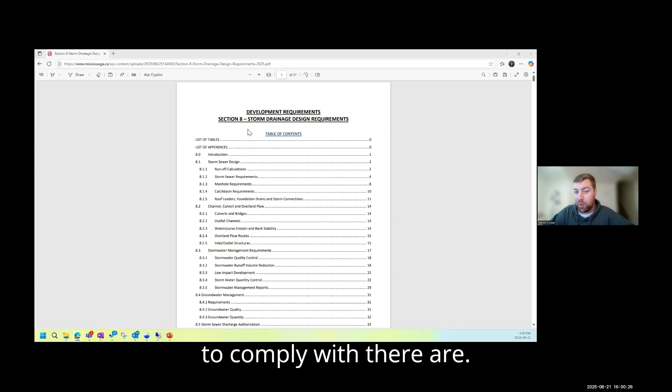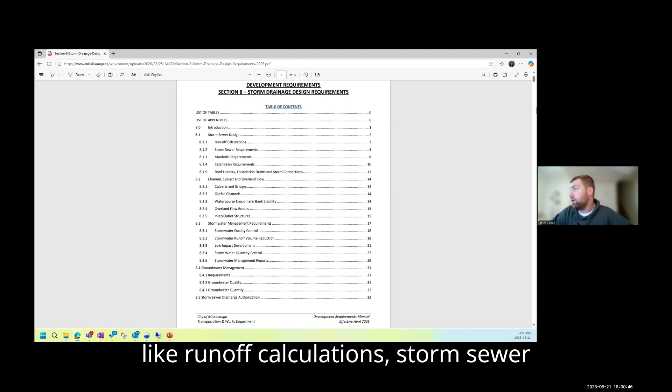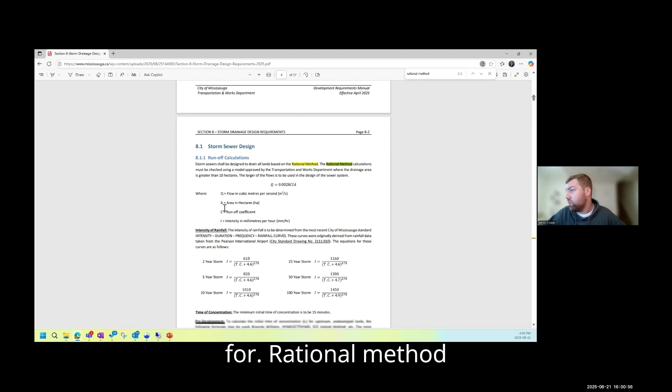So just as some context for what city staff look for, what conservation authorities review, and what developers have to comply with, there are, I'd say often, but probably always, going to be storm drainage design requirements for cities. So anytime a developer wants to build something, they have to submit it to the city meeting the requirements outlined here. You can see in the table of contents there's runoff calculations, storm sewer requirements, catch basin requirements, all of this stuff. And if I look up, we're going to look for rational method, for example.

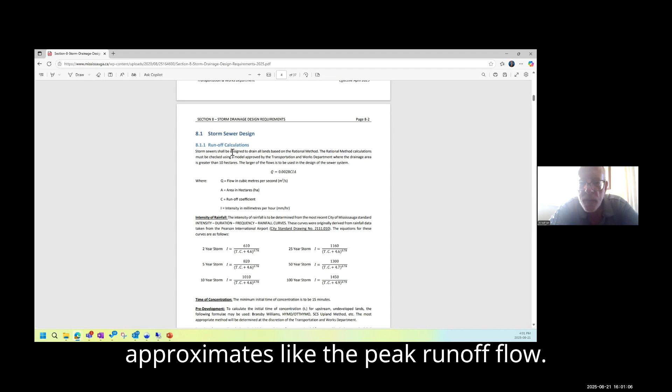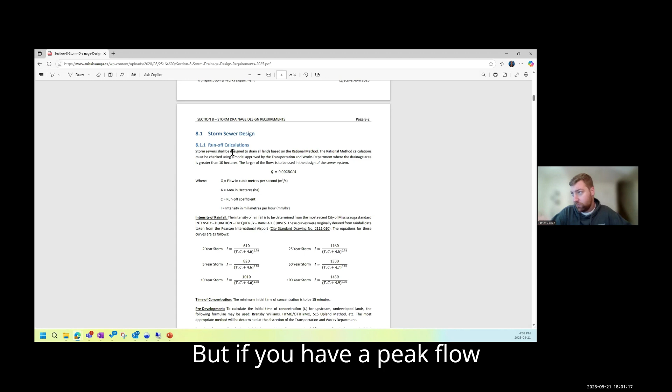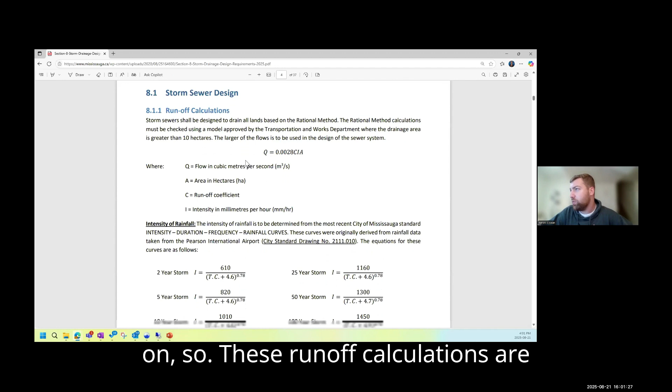There is this very simple formula that is often used for smaller developments that approximates the peak runoff flow. I'm sure you can appreciate that when it rains, obviously the amount of water matters for flooding and this and that. But if you have a peak flow rate, a maximum flow per second that exceeds some threshold, streams will get blown out. That's when you get heavy erosion and so on. So these runoff calculations are kind of the bare bones of that analysis for stormwater.

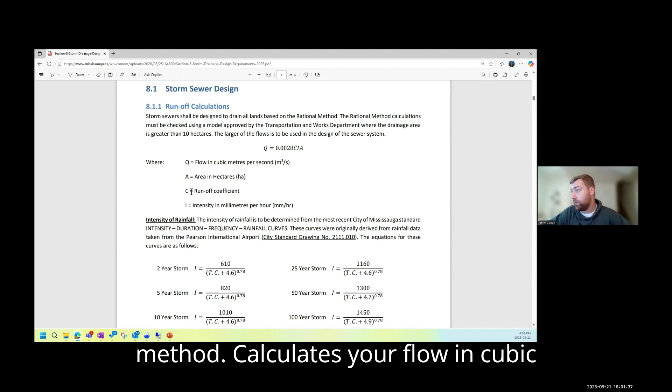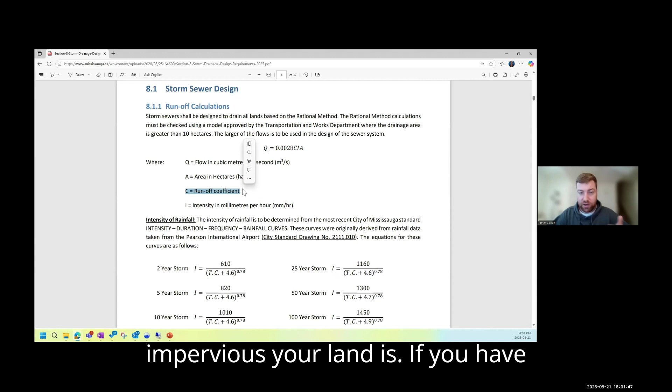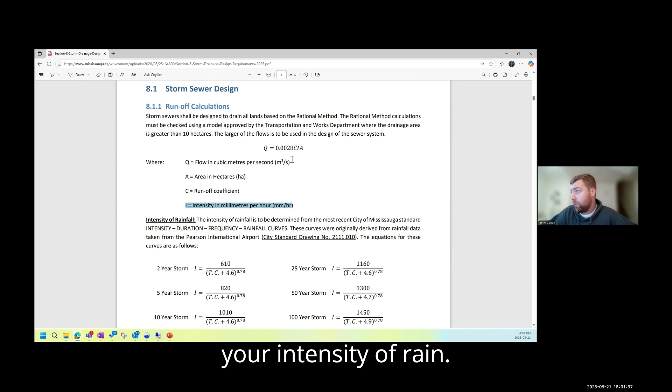So runoff calculations: the rational method calculates your flow in cubic meters per second using the area of a particular drainage area, a runoff coefficient, which represents how impervious your land is. If you have buildings and parking lot and grass, sometimes it's kind of a composite, like an average. And then you have things like your intensity of rain, and then that will give you a flow in cubic meters per second according to this version of the equation.

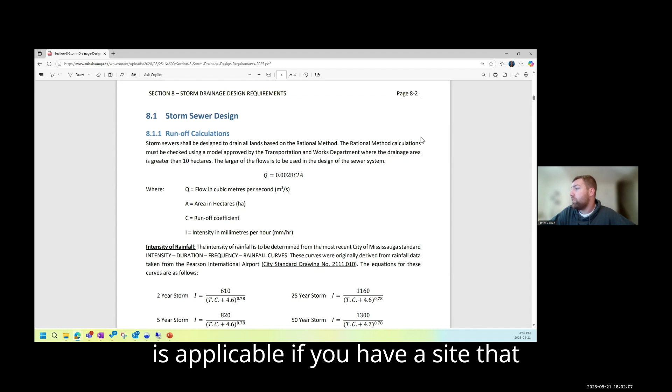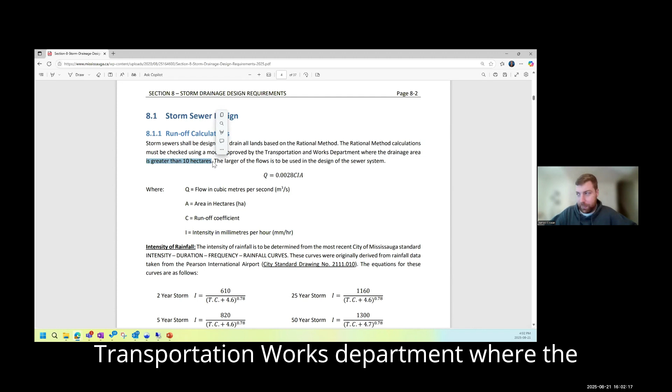And the rational method calculations must be checked using a model approved by the Transportation and Works Department where the drainage area is greater than 10 hectares. Okay, that's good to know. So the city might have experience reviewing, or whoever you're talking to at the city, this Rajesh gentleman might be familiar with some models for that reason.

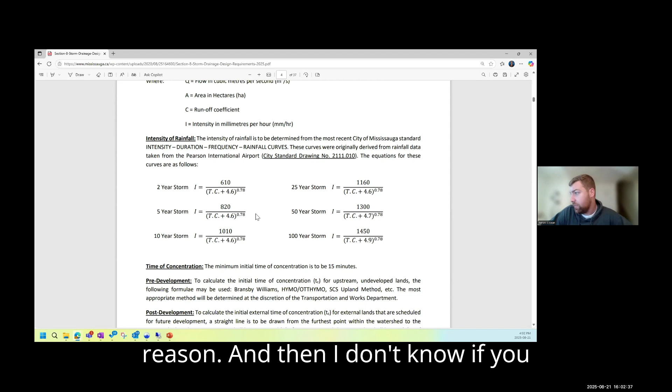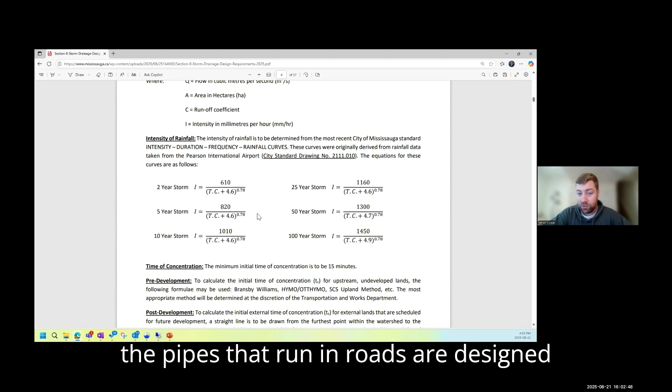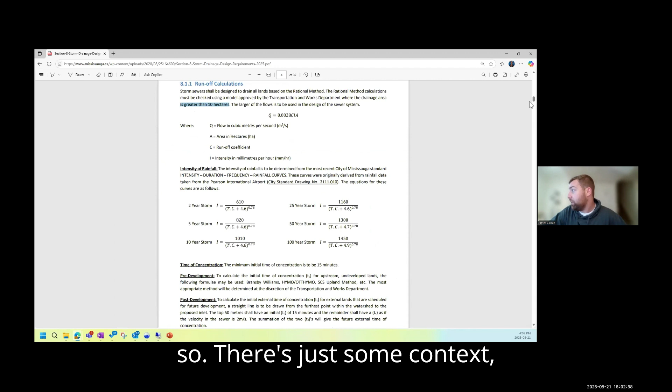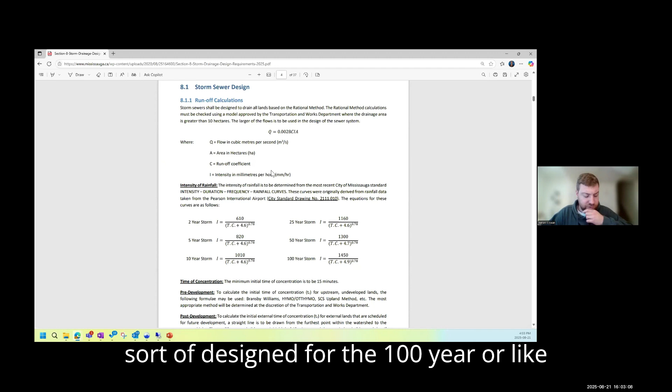And then I don't know if you want me to get into the whole mess of design storms, but in case you don't know, essentially the pipes that run in roads are designed to handle the biggest storm you'd expect to find in 10 years in most cases. And how that storm looks can be calculated using these equations here. So there's just some context. And the bioretention ponds, are they sort of designed for the 100 year or like the Hurricane Hazel?

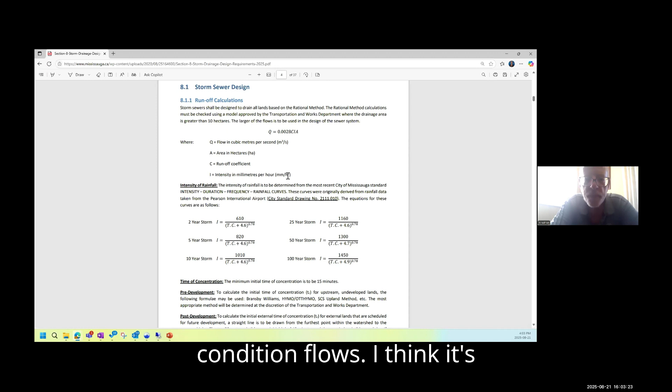I believe so, yes. The way that the ponds work is that they're designed to match the pre-development condition flows. I think it's for the 100-year design storm. I haven't done this stuff in a long time, so don't quote me on that. But yes, ponds are designed for much greater than the 10-year design storm.

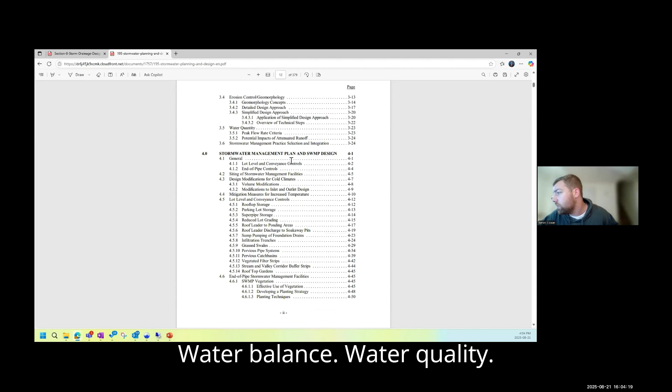And that hasn't been updated, right? Since 2003, it looks like. Not to my knowledge. Let me take a look here. If I go to the actual Ontario website, what would it say here? Copyright Queen's Printer of Ontario, 2003. So I don't think so.

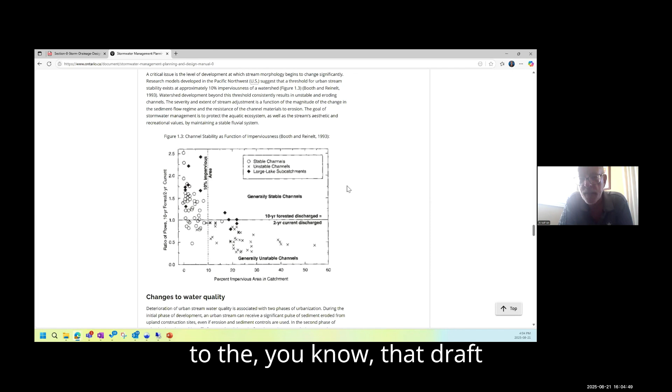And James, what's the connection to that draft 2022 LID provincial document? It's 310 pages. Is that online somewhere? Yeah, if you just type in the Ontario Low Impact Development Guide, LID guide, 2022, I think. Is it there? This one here. Stormwater management guidance manual, proposal updated. Is it finished? No, it's been in draft mode for a bit, but I think internally they are looking at it because of the additional residential units.

Oh, because of the hundred, what is it, the 100,000 homes in 5 years, or whatever the goal is, right? No, 1.5 million by 2031. That's just the provincial goal. I don't know where I got 100,000 from. I think I might be thinking of Kitchener or something.

I'll be honest, Jonathan, I'm not really too familiar with this. I'm glad that we have this, but I'm just more familiar with the STEP wiki guide. Yeah. I'm not going to go digging around for it on your time.

I'll talk to Amanda on our team and see what there is for the Smart Blue Roof that's publicly available, and I'll send it over to you. Okay. And I'll send a quick email and Alice might pick it up next week before school and then might start planning for something in October. Great. The Blue Roof is in operation until the very end of October, but there's always the question of whether we have water on it or not. It's kind of less exciting when there's no water ponding, but we'd be happy to show them in that case. Okay, I'll let him know. Thanks, James. This has been great.